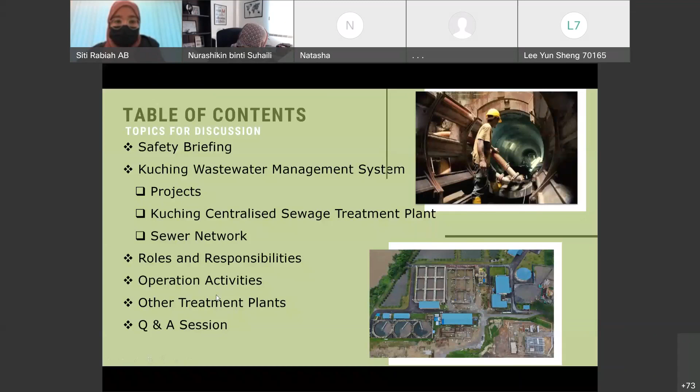Our treatment plant is considered a restricted area where only authorized people are allowed to go in. We are a non-smoking zone plant. All personnel and visitors have to wear proper shoes in the treatment plant. We practice a buddy system because we are dealing with deep tanks and deep shafts. We will not allow our officers or personnel to walk on their own, so just in case an incident or accident happens, they will have at least one witness or buddy to get help. Of course, visitors are not allowed to touch any machinery, process equipment, panel boards, or chemicals.

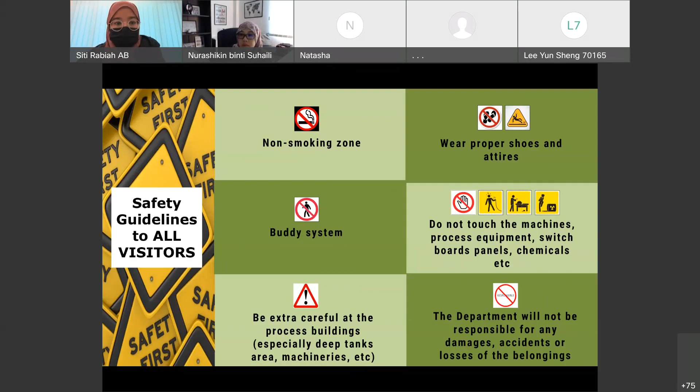So we proceed. May I know if any of the students are confused with the terminology of sewer, sewage, and sewerage? Can any of you volunteer?

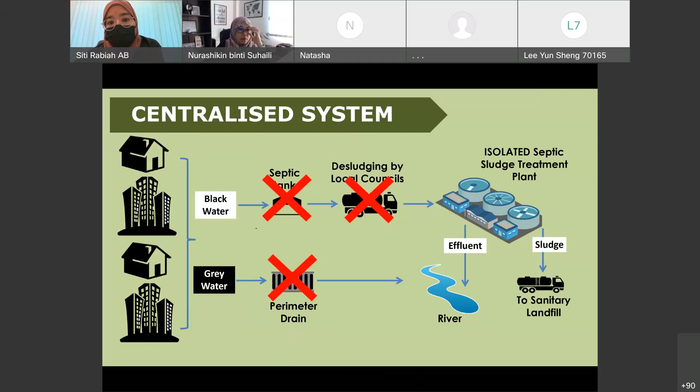It went viral a few years ago that in Japan they can rear fish in the perimeter drain, but unfortunately it can't be done here so far, not until everyone changes their attitude or connects to the centralized system. Okay, so what we do, we construct the sewer pipe from the houses.

We retrofit the piping at these houses, and we connect it through a true gravity flow sewer network, and it goes into the centralized sewage treatment plant. So you can see we no longer need the desludging work. So maintenance-wise, it saves quite a lot.

And also we save some space, because you can see what we have encountered before, especially rumah-rumah lama in Jalan Green or Rubber Road or old housing in the city center. Most of these people are now in their 70s or 80s. So when we visit the house, apparently they have extended the house, because last time the septic tank protruded above the ground, unlike now the septic tank is underground. In the old housing system, the septic tank protruded above the ground.

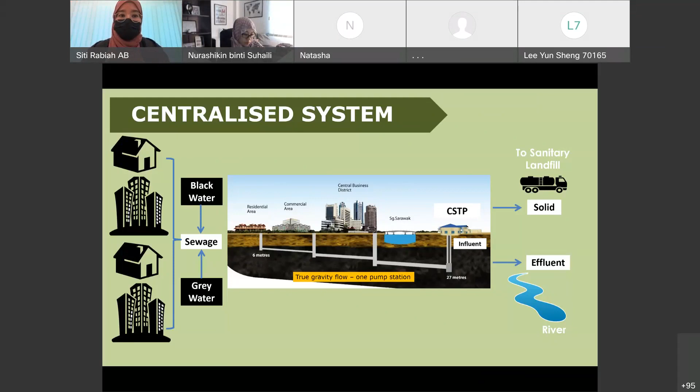Okay, so among the benefits of the centralized system, of course it reduces the amount of untreated waste, and it removes odor from the open drains, because there is no more discharge into the perimeter drain. So there's no smell, you know, Sarawakians call it bau juruk.

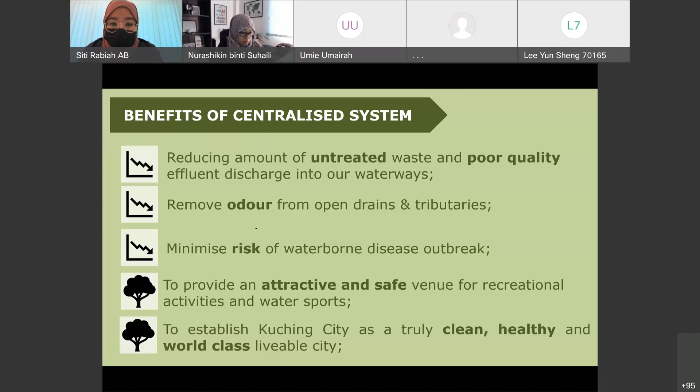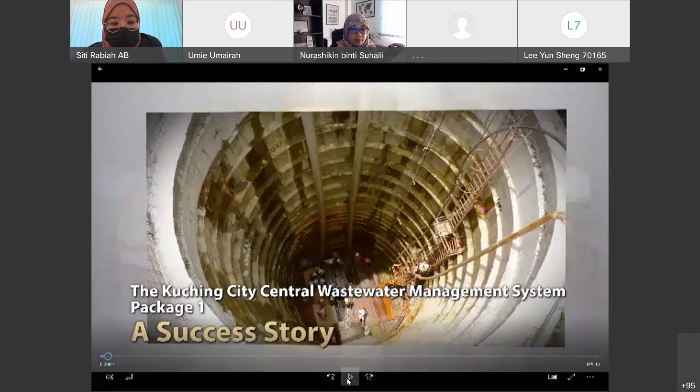So Kuching Wastewater Management System, I have a video here, but I'm not sure. I'll just share it, sekejap. Boleh tanggalkan video tu? Yes, we can view. Ada dengar bunyi kah? Bunyi tak ada.

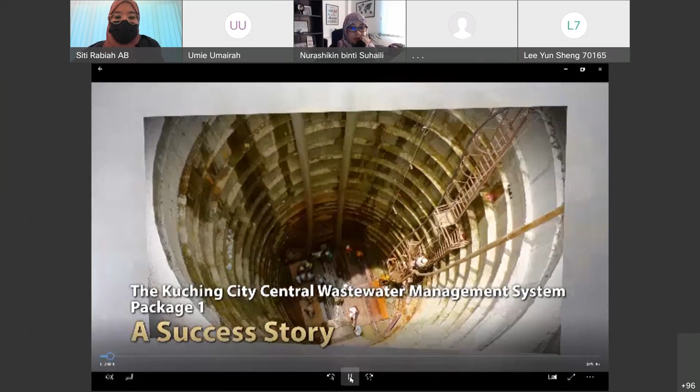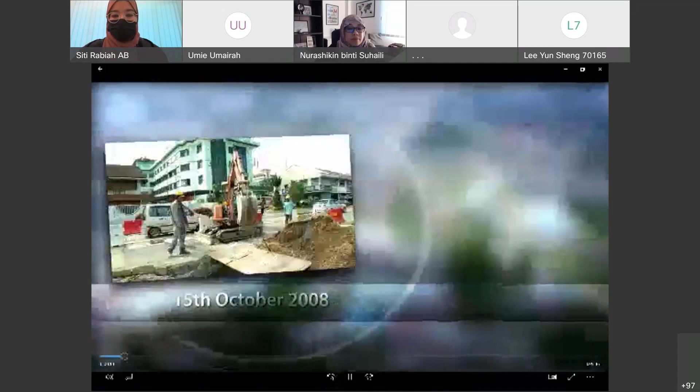Kuching City Central Wastewater Management System, Package 1, was implemented on 15th October 2008. This unique project, requiring a high level of expertise, was undertaken by turnkey contractor Kumpulan Nishimatsu Hock Seng Lee, or K&H Consortium.

Ada dengarnya bunyi juga kah? Yes, we can hear. So I'll just play this video for maybe 4 minutes, and then we go back to the presentation, okay?

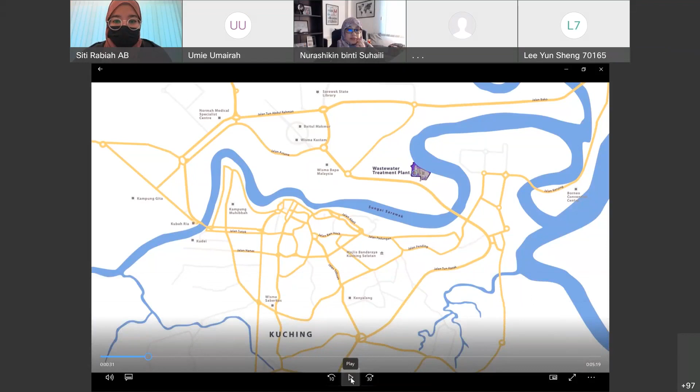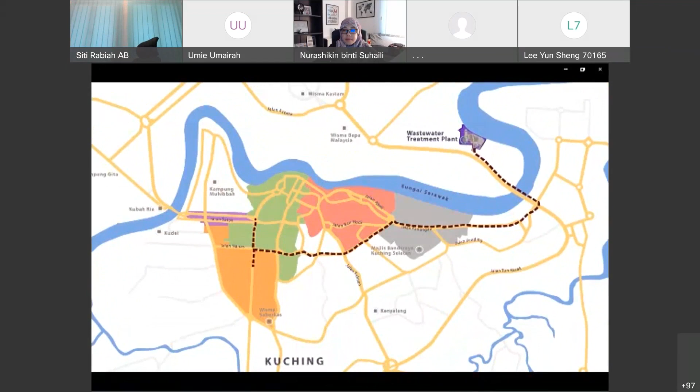The project involved the laying of an underground sewage pipeline system, encompassing 5 areas located mainly within Kuching city south. It covers a total of 64 kilometers of sewer network using gravity flow, which channels wastewater to a wastewater treatment plant with a capacity of 100,000 population equivalent, or PE. In order to ensure the task was implemented on time and with only minimal disruption to the city, the consortium adopted the state-of-the-art trenchless tunneling method, following in-depth studies on the successful completion of similar projects overseas.

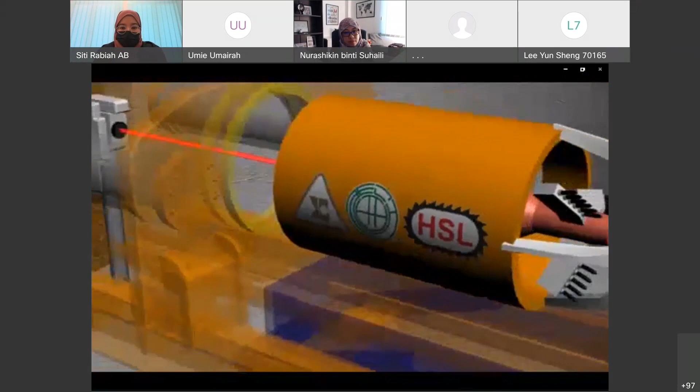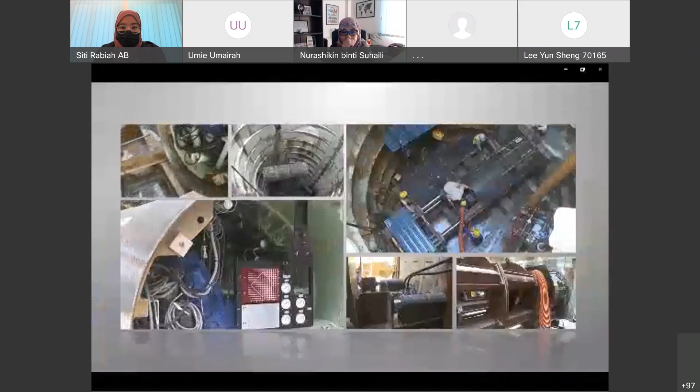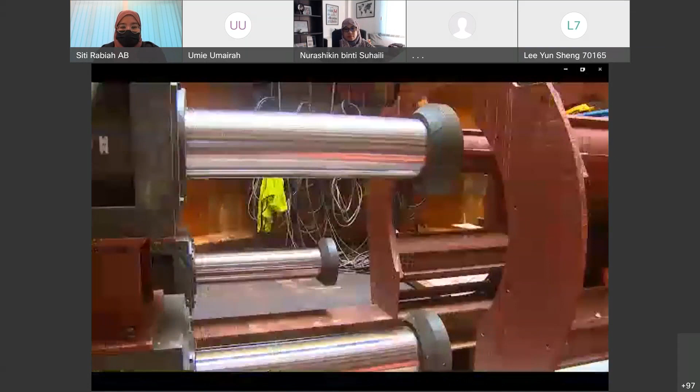With this proven method, the consortium procured by far the largest fleet of tunnel boring machines in Southeast Asia to deliver the job and to fulfill the government's stringent standards. This brought in an unprecedented scale of technology transfer, involving more than 18 million ringgit worth of machinery and technology, acquired from Germany, Japan, Taiwan, and Singapore.

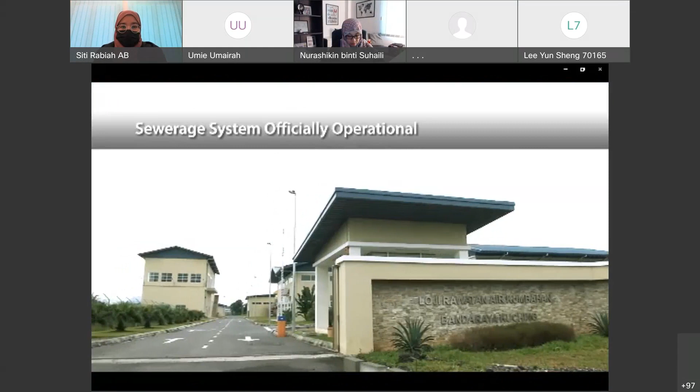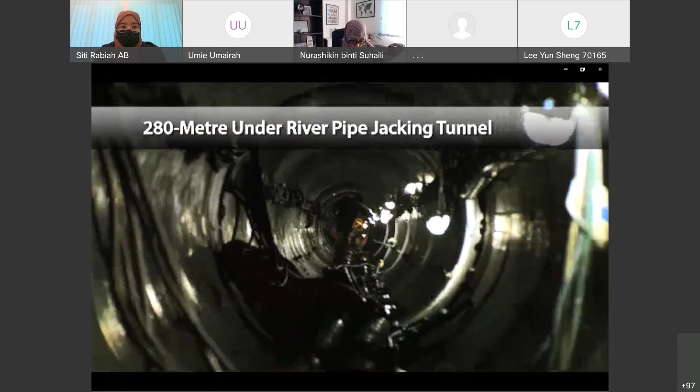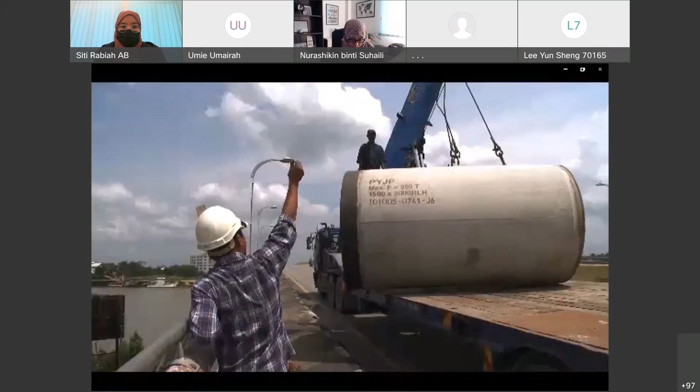The wastewater treatment plant was handed over in January 2012, while the main sewer line was completed in April 2013. The sewerage system was officially operational in July 2013. The project achieved many milestones, including a 280-meter under-river pipe jacking tunnel, the longest in Borneo, the deepest inlet pumping station in Malaysia, at 27 meters deep, and an impressive 2.5 million man-hours of construction work without any lost time injury. Combining the technical expertise and resources of the K&H Consortium, this first ever centralized sewerage system in East Malaysia was completed on schedule and within budget.

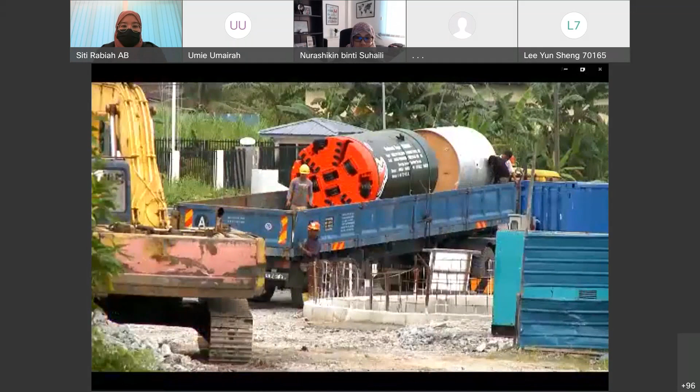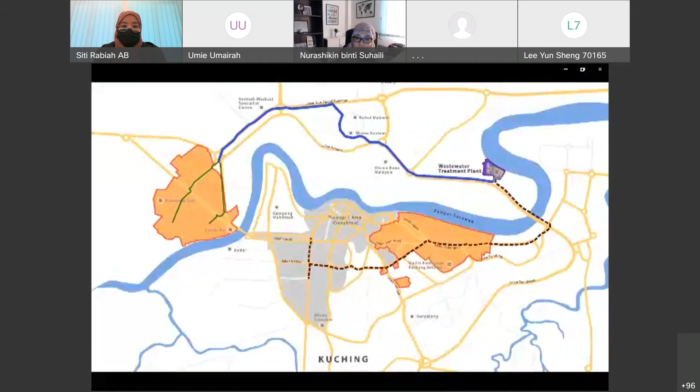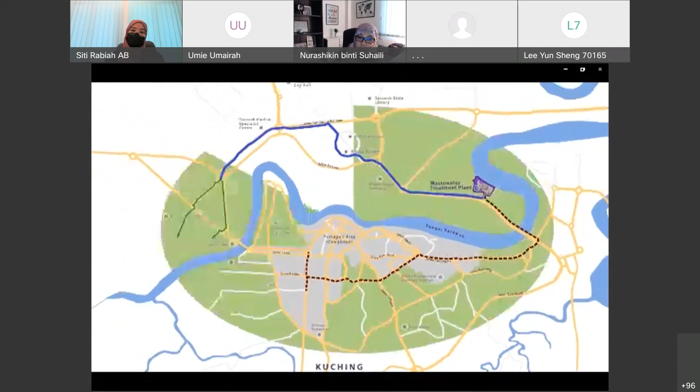With the successful completion of Package 1, covering mainly Kuching City South, the many benefits of this modern sewerage system should be extended to residents of Kuching City North. As part of the Kuching Wastewater Management Master Plan, the proposed Package 2 Zone 1 will include, firstly, the construction of a northern main trunk sewer spine totaling 7 kilometers across the Petra Jaya area, running parallel to the currently completed main trunk sewer line located to the south of the river. This will form a complete ring for the sewer network.

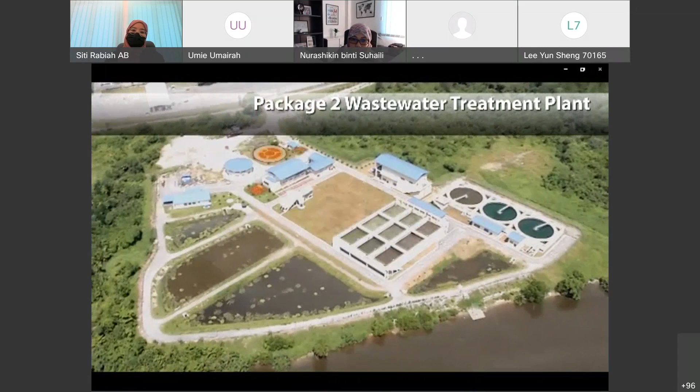Secondly, Package 2 will include the expansion of the existing wastewater treatment plant by an additional 100,000 PE. The new sewer line will be connected to a new inlet pumping station located at the existing treatment plant, thus expanding the sewer network to include both the city north and south.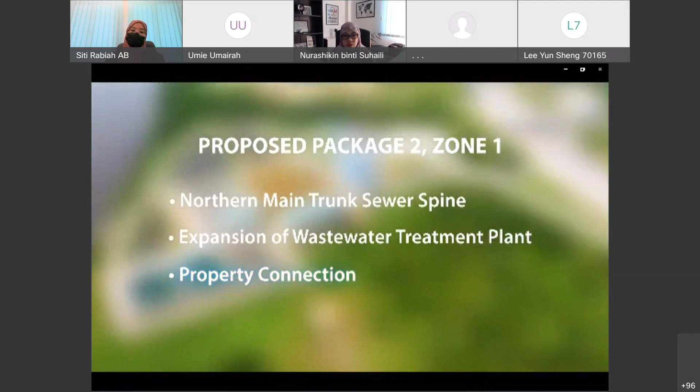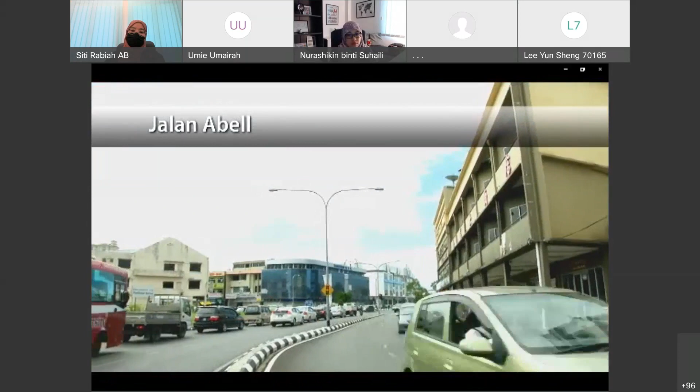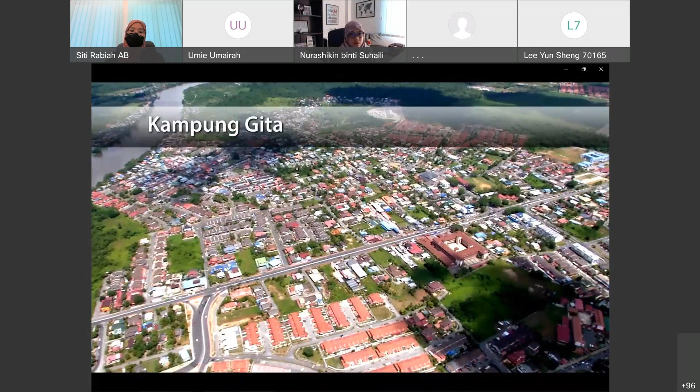Thirdly, this package includes property connection of additional 42,000 PE, consisting of 18,500 PE at Kuching South, covering mainly commercial shophouses in the city center, along Jalan Abell, Jalan Ban Hock, Jalan Padungan, and Jalan Tabuan, while the remaining 23,500 PE at Kuching North, covering mainly residential areas at Kampung Gita and Kubah Ria, along the proposed northern trunk sewer. As these areas are located at the most upstream point, they will provide sufficient flushing volume to maintain flow along the trunk sewer. Along with the northern trunk sewer, large institutions such as Normah Medical Specialist Center, Wisma Custom, Baitul Makmur, and Wisma Bapa Malaysia will be connected.

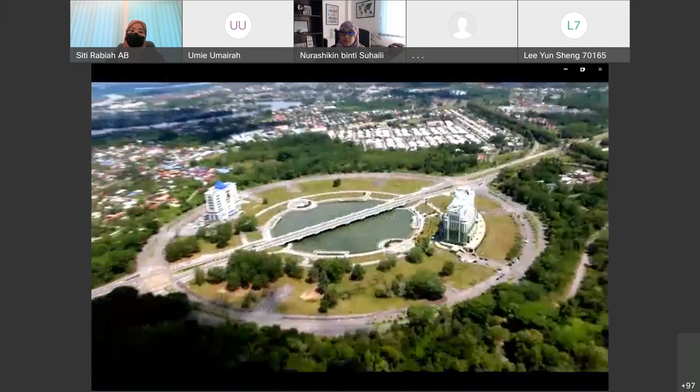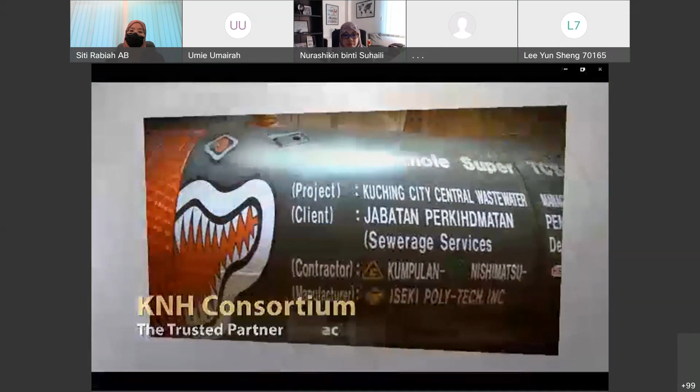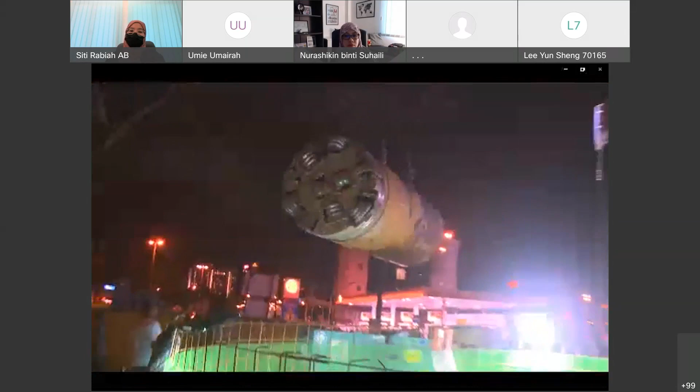Property connection work will be carried out progressively, beginning with higher density areas. Economically, the government enjoys long-term cost savings, as it can pass on all pipe connection costs to individual developers within the city area in the future. KNH Consortium's vast experience and technical expertise acquired from Package 1 makes it the most suitable candidate for the implementation of the proposed Package 2. The consortium's massive investment in specialized machinery for tunneling work means it can mobilize immediately, thus ensuring timely delivery of the project while adhering to the standard and budget stipulated by the government. With the implementation of Package 2, Kuching City will be one step closer towards realizing the vision of a clean and healthy waterway for the enjoyment of its residents in the near future.

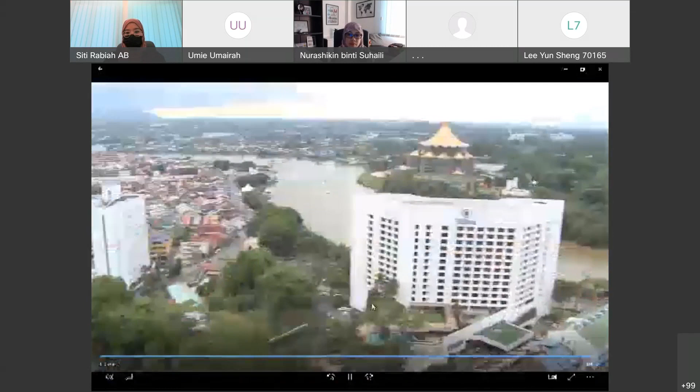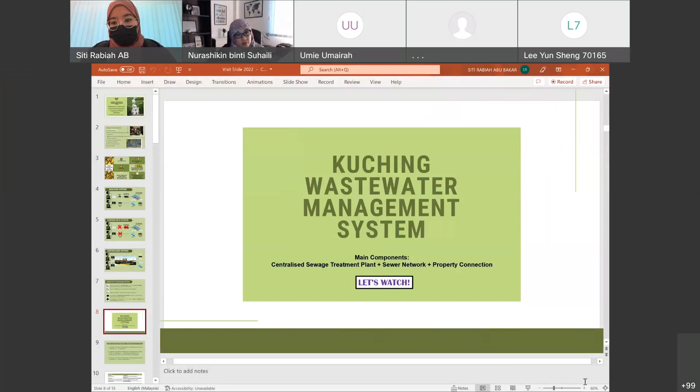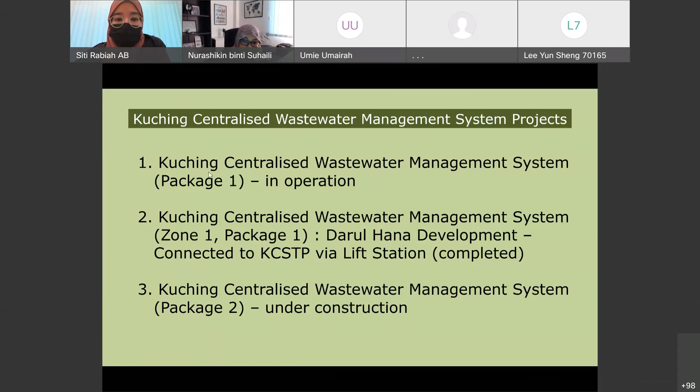Okay. So you've seen the video just now. It's basically what we actually do in the department and the plant operation lah. So we go back to our Kuching Centralized Wastewater Project. As you've seen just now in the video, it covered the Kuching Centralized Wastewater Management Package 1 and Package 2, which is still under construction. Apart from that, we have also completed the connection of Darul Hana development into our KCSTP as well. Darul Hana development is a state government project for resettlement of the kampung people along the Sarawak river, but they have yet to move in lah. So this is a little bit of background of the project.

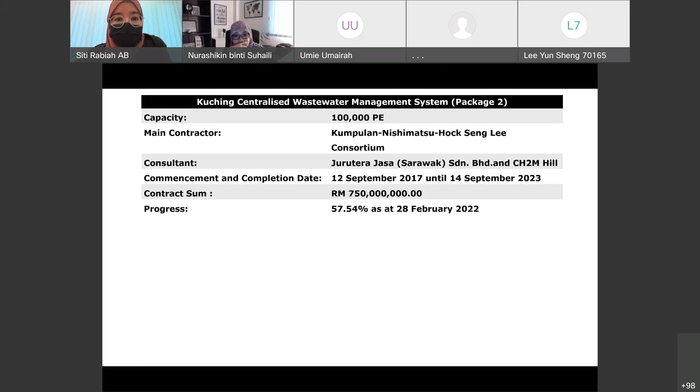So for Package 1, we have the main contractor K&H, Kumpulan Nishimatsu Hock Seng Lee, and the consultant is Jurutera Jasa Sdn Bhd, with a cost of 530 million. We have another smaller one, Darul Hana development, costing about 17 million. The works were carried out by Maximus Holdings Sdn Bhd, and the consultant is Consortium Malaysia, completed in 2019. Then we have the Package 2 project, costing about 750 million. As of February, the progress is about 58%. Roughly until 31st December 2021, we have about 99,000 PE connected into our Package 1 existing treatment plant lah.

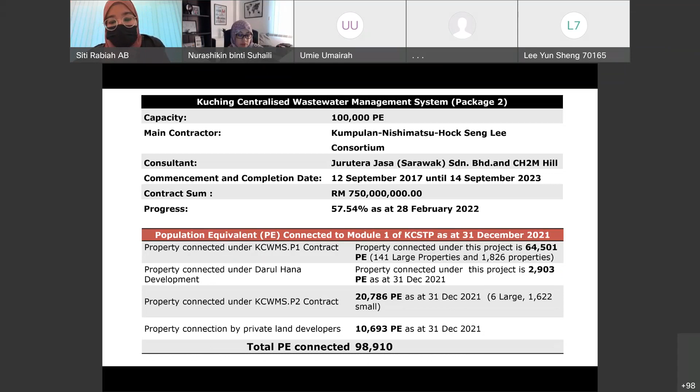So going back to the centralized CSTP, the wastewater treatment plant itself, usually if you visit our treatment plant, you will stay at this visitor center, number 8. So we have this inlet pumping station. Then we have this headworks. We have this ASR, activated sludge reactor. We have this secondary clarifier. This is the wetland, 4 ponds. We have the dewatering building where we produce the sludge cake. The operation building is where the administration and the operation monitor the process.

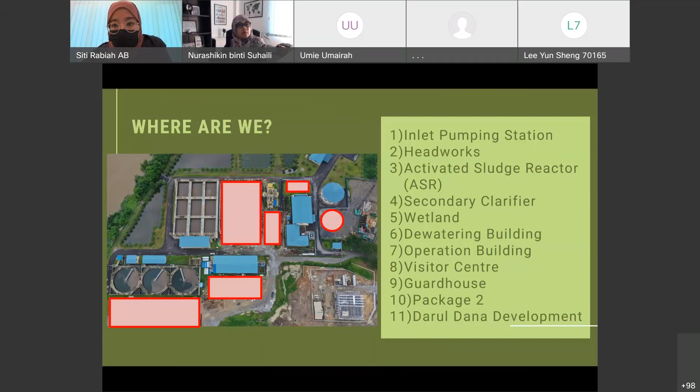The visitor center was the site office initially during the construction, but during the handover, the site office still looked good. Then we took over from the contractor and converted it into our visitor center lah. So this is the guard house, the entrance. These are the package 2 duplicate buildings, among the scope of work in package 2 lah, the extension of another 100,000 PE. Then this is the Darul Hana development, part of the Darul Hana development.

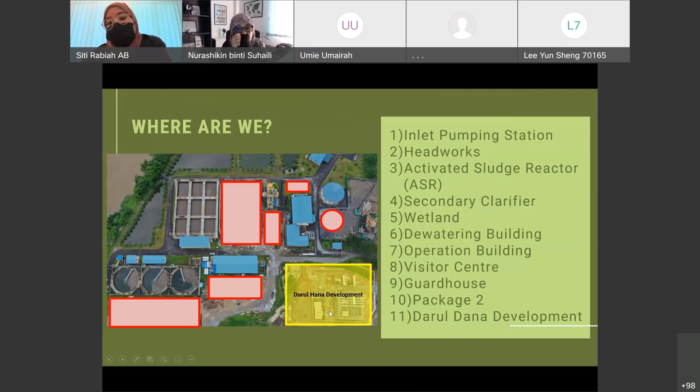For the treatment process, the influent comes into our IPS, inlet pumping station. This inlet pumping station is about 27 meters deep, so roughly a 10-story building underground. Okay. So we have the IPS, and then it flows into the fine screen to screen all the smaller bits of debris that escaped the coarse screen, and it will also screen grit, sand, small stones, hairs, and also oil and grease.

Then moving forward to the ASR, this is where the biological treatment starts to kick in, where we give aeration, and in some of the tanks we just switch off the aeration so that it can do nitrification and denitrification processes. Then it flows into the secondary clarifier, where we separate the top clear water as effluent and discharge it to the wetland.

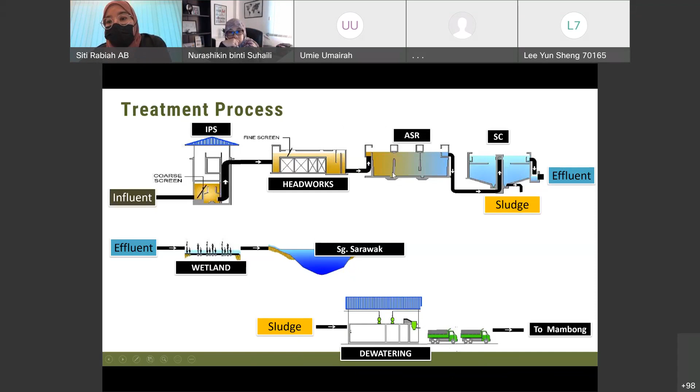But the bottom one, when the sludge settles at the bottom, we pump this sludge into the dewatering building. We add in some polymer to do the mixing, to do the dewatering. Then the cake will be sent to Mambong Sanitary Landfill. As for the excess water from the dewatering building, we channel it back to the ASR to be reused lah, recycled. So this is how it looks like.

Influent pumping station. The diameter is about 20 meters, but 27 meters deep. So this is where the collection of sewage is carried out lah. The coarse bar screen or trash rack traps the large debris at the inlet screen. Headworks, like I mentioned just now, removes the floatables, grit and suspended solids that can be filtered lah. Whatever cannot be filtered will flow into the ASR.

ASR is where the biological treatment happens. We provide DO so that the microorganisms have oxygen to multiply and eat more organic matter. Then it will remove organic solids, BOD, and nitrogen. Okay, and also with healthy microorganisms, it can also improve the sludge settleability.

Here, the secondary clarifier has a very slow wing arm that scrapes off all the floatable scum and channels it into the scum box to be processed. But there is also a weir at the tank to release the clearer water lah. With the weir, it will hold back the larger floating scum. Then we have to manually remove it from the tank.

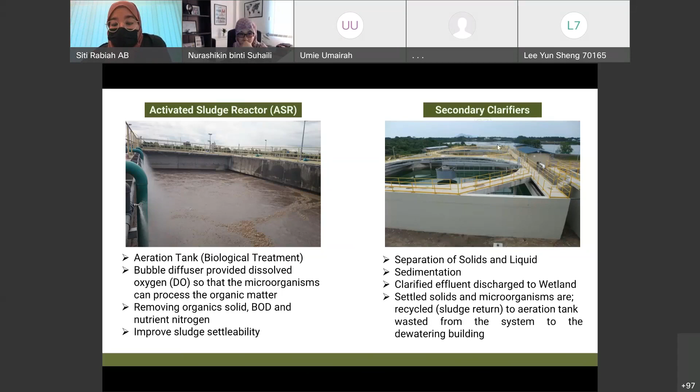Dewatering building: for our process, we reduce the water content in the sludge for production of dry sludge at a minimum of 20% dry solids. This is based on the MSIG lah. It's also a requirement by the Department of Environment. We do sludge thickening, we add in polymer to ease the dewatering process. And the sludge cake will be sent to Mambong Sanitary Landfill.

For the wetland, this is actually what we consider a tertiary treatment. If you visit some of the treatment plants, some just discharge directly from the effluent discharge point to a nearby river or drain. Or like in Semenanjung, there are plants that install UV just in case there's an outbreak, then they can switch on this UV to at least improve the effluent discharge lah.

But here in KCSTP, we adopt the wetland to be our tertiary treatment just in case of emergency, of course, because we have bigger land. But if the land is very limited, then you can have other options for the tertiary treatment lah. This wetland also gives us an indicator of whether our effluent quality is good, getting worse, or getting better.

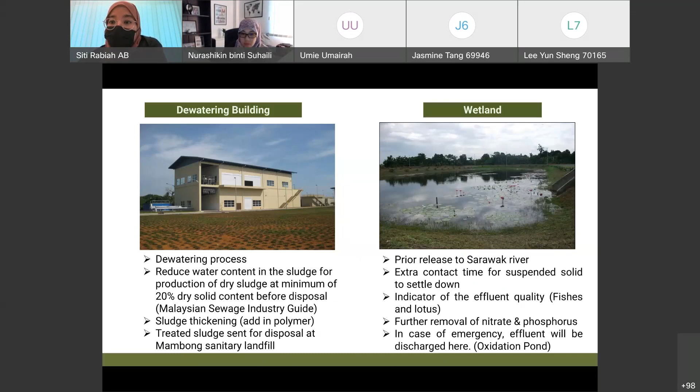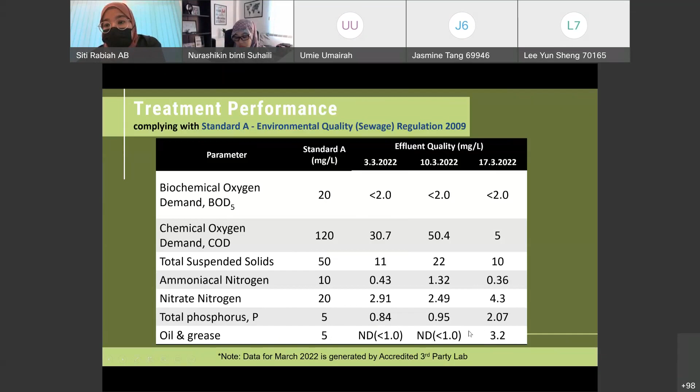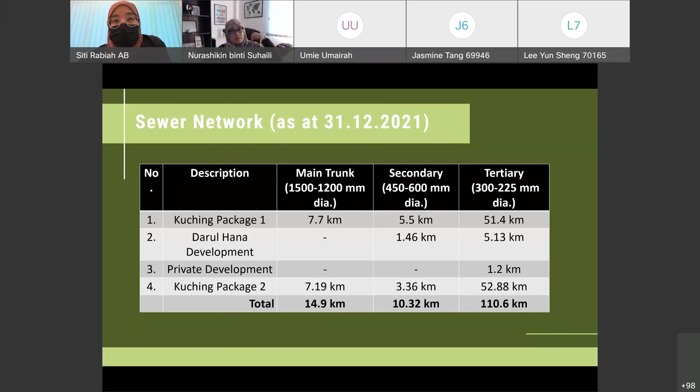These are the number of blockages that we have received since we took over the treatment plant, the operation and maintenance of the centralized system. If you can see here, in 2017 there were a lot of public complaints because they are not used to the system. Like, last time when you flush, you only flush and never bother where it goes. Sometimes they just flush whatever. Some even flush

chemicals, oil, everything into the toilet bowl. Then it will affect the efficiency of your septic tank. But if you flush it into the centralized system, it will not affect your own septic system because you are connected to the centralized system, so it will affect the whole sewer system instead. So if your neighbor, say your neighbor downstream, didn't maintain or abuse the centralized system, throwing things that shouldn't be thrown, as we have encountered before,

I think hair is normal, but hair is one of the major causes of sewer blockage. If you shower, especially ladies, your hair, you can see a lot of it at the floor trap. In certain houses, because the floor trap prevents hair from going in, it gets stuck at the floor trap, and they even took the trap off. So this hair eventually goes into our sewer system, which is not good for our operation and maintenance. Also, condoms are very normal, especially likely from the hotels.

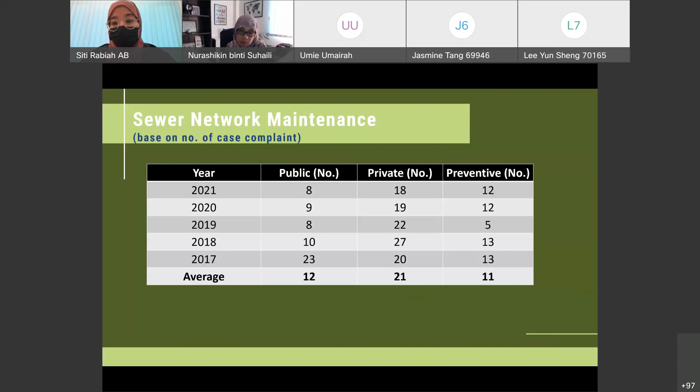Waste oil from the eateries is the major one, because when oil mixes with feces, and food waste like rice or chicken fat, vegetables, it hardens. Because the centralized system doesn't flush 24 hours, it depends on how many people use it. But at night maybe everyone is sleeping, so there's less water flow, so it may get stuck at some points of the sewer network. Until tomorrow morning, when everyone showers and goes to work, there's the flushing effect again, which moves all this fat, oil and grease slowly into the sewer system and eventually into the wastewater treatment plant.

We have received a lot of complaints from house owners up to the minister level. Everyone complains because they thought it is an abandoned project since no one works there. The shafts are here and there, so it disrupts the road, turning here and there. But actually, we are digging the shafts to stand by for the jacking of pipes.

So we cannot buat shaft bila kita mau jack saja. It will slow down because actually what consumes the most time in construction of this sewer network is the construction of the shaft itself.

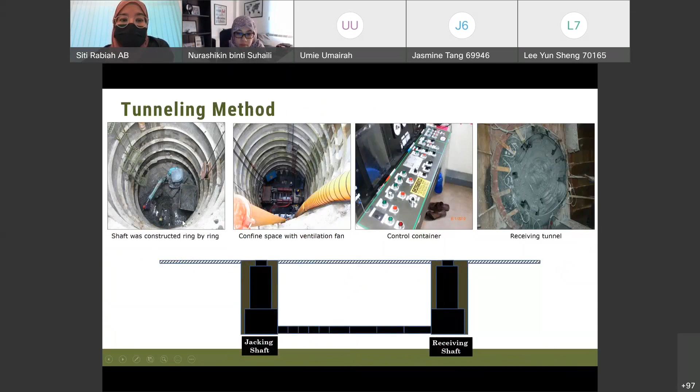So this is a trenchless construction method. Initially, this one you can see they use the method of concrete ring, cast layer by layer, but here you can see the materials is different. It uses steel casing.

Ada juga we lay the sewer network using open cut. For depth less than 2 meter, we use open cut.

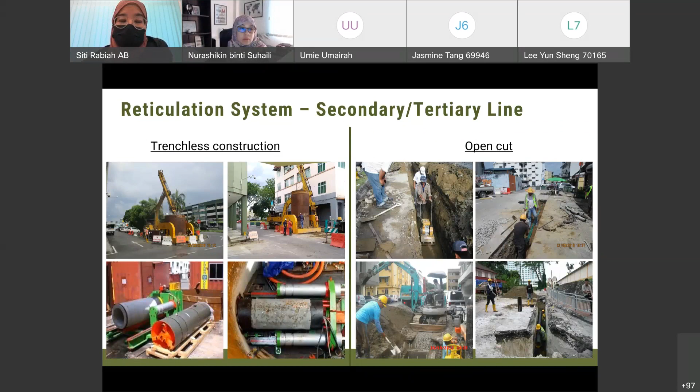So roles and responsibility of our unit, operation and maintenance unit, we have the same section for every unit. Ada setiap unit, Kuching, Miri and Bintulu, ada operation and maintenance section.

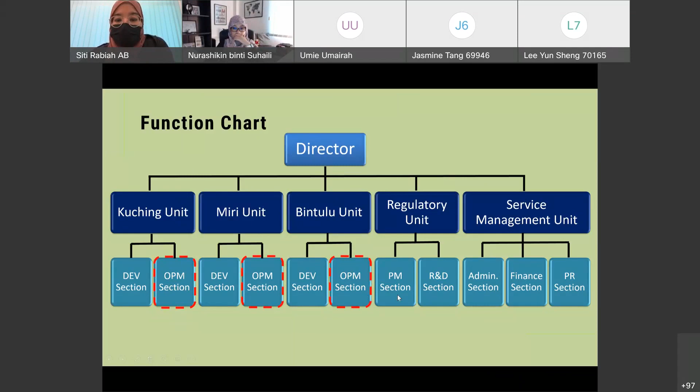So what we do, untuk treatment plant operation, of course we process the monitoring and daily operation in terms of performance of the plant, whether the parameters are at the optimum level. And then we do also PPM, predictive and preventive maintenance, where we do the maintenance for M&E and I works. We do sewer network maintenance.

If ada blockage, then the public will call us and we will send our men to do the clearing. Routine maintenance work, the general one, clearing and cleaning works. We have compound maintenance work, grass cutting. And then we also have building maintenance work and wayleave application.

And we do administrative works like public relation, contohnya like this one. This is part of our PR works where we do educational talks, not even only to UNIMAS, we do even to other agencies yang interested to visit us. We also assist UNIMAS students doing PhD for their research.

These are the contoh-contoh kerja-kerja yang terlibat di dalam operation works. Of course, we have 3 shifts of 8 hours, so pagi, petang, and malam.

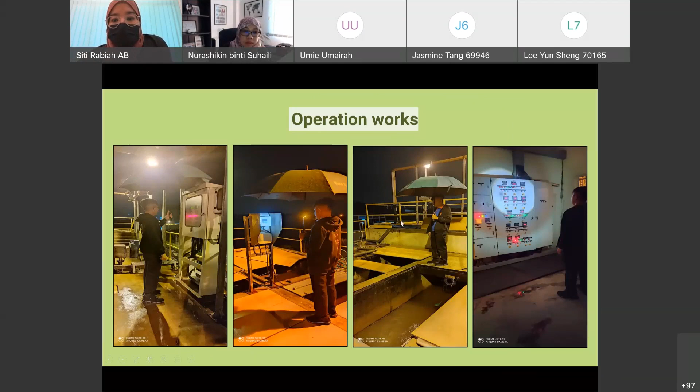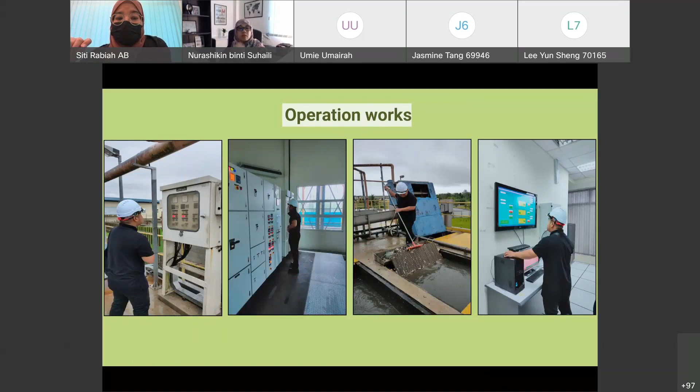So they monitor the reading, the panel. We are actually monitoring it using a SCADA system, where there's a software installed, where they can switch on and off the equipments or machineries just using the computer. But sometimes they also need to visit the panel or the equipments just to see whether, just in case, if it's not functioning well.

So in 2021, we have carried out 52 numbers of sampling. So none of it so far had non-compliance. Only for sludge dryness, we only carried out 51 numbers because there was 1 week of maintenance of the dewatering building, the maintenance of the hopper, so they cannot get any sample to be tested.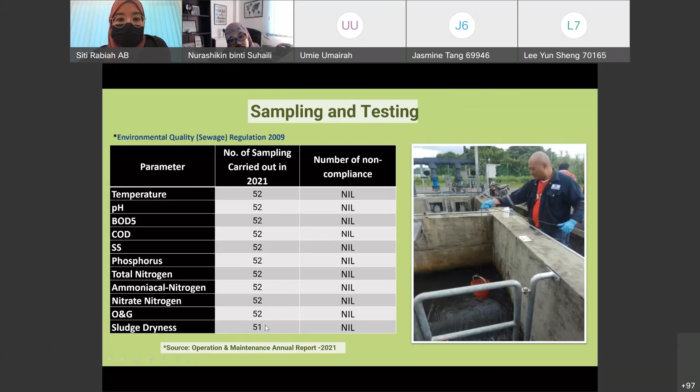Sewer network maintenance, we do periodic inspection, especially at the hotspot area. We also repair the major sewer. We do clearing blockages, we flush. Also manhole level adjustment, if any. And also manhole cover replacement, if ada yang hilang.

So these are contoh-contoh kerja-kerja yang dilakukan. These are considered as the 3D work: dirty, dangerous, and apa lagi satu? Difficult.

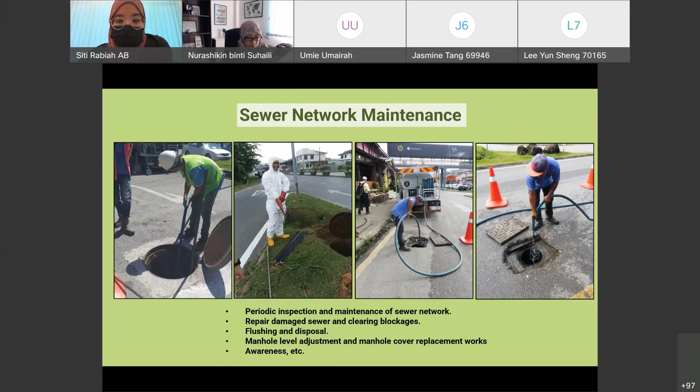For safety and security, we send our personnel to get the AESP certification before they get involved in sewer network or plant maintenance work, because manholes are considered a confined space. Also for our IPS, since you only have one exit, there has to be briefing or exposure to safety and health knowledge regarding confined space.

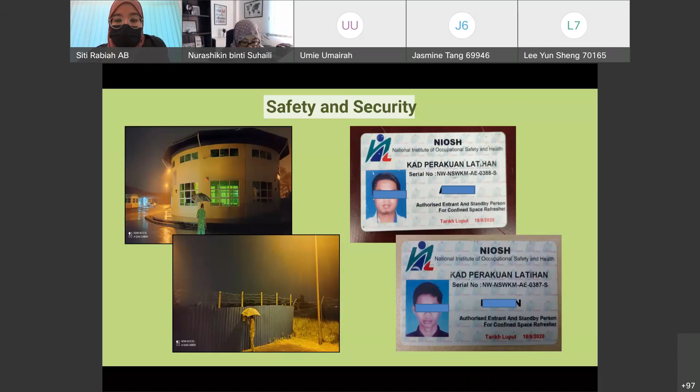These are the compound maintenance work, clearing works, public relations. If Nurashikin can see some of your students here, I believe, engineering course.

Other than this, we also have other treatment plants in Miri. This is a new one, recently completed last year. Despite the COVID situation, we managed to take over one of the plants. But if you see in Miri, the process is not quite the same - the secondary treatment uses extended aeration.

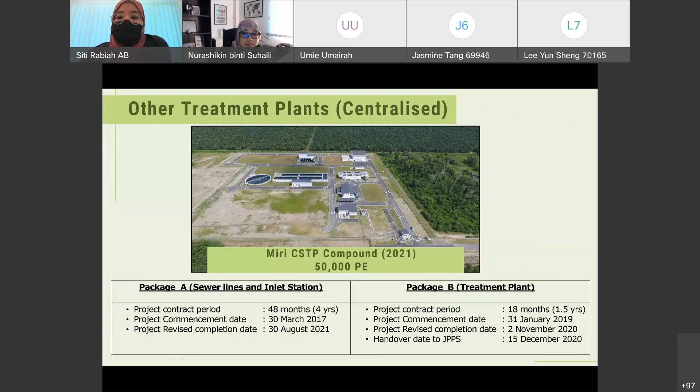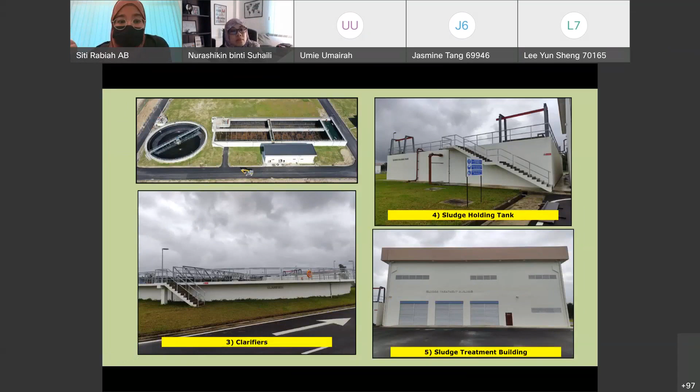This is the operation building. In Kuching, we have headworks, but in Miri, we have this aerated grit, grease, and secondary screening. In Kuching, we have ASR, in Miri we have aeration tank, sludge holding tank, clarifiers. In Kuching the tank is on the ground, but in Miri it's underground. In Kuching we have wetland, but in Miri we have effluent disinfection tank. We don't have wetland in Miri.

Why did the designers or consultant not propose a wetland in Miri? Because the river source for discharge is far, so they just discharge it to the perimeter outside earth drain. Then eventually this earth drain becomes the so-called tertiary treatment before it reaches the river.

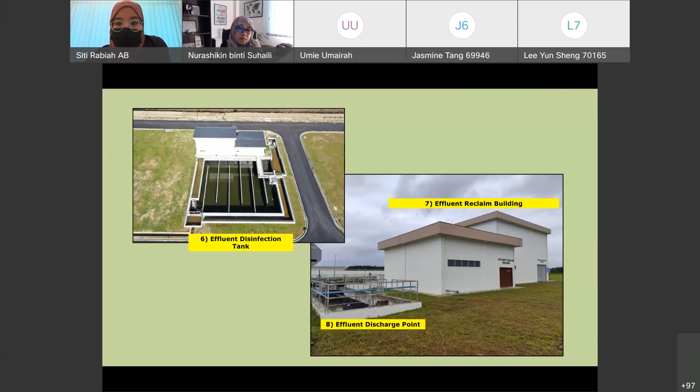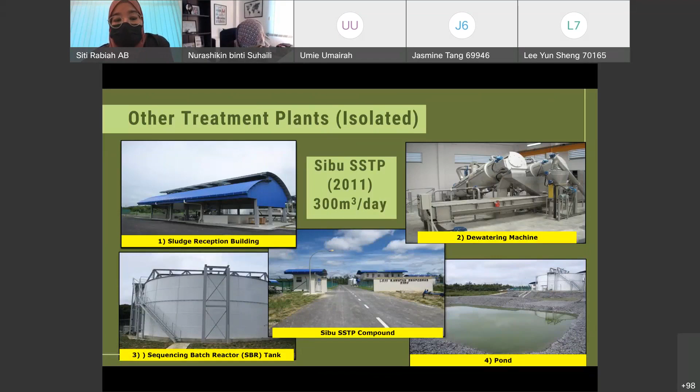Sibu is the same size, also applies the SBR process. Only in Miri, if you see, they use a rectangular tank, but in Sibu we use a circular tank.

We have also taken over Bintulu's sewerage assets as well, starting 1st of January 2021, we took over Bintulu from BDA. They have a lot of pumping stations and lift stations, 80 numbers. If you see in Kuching, we only have one, but in terms of maintenance, we only need to maintain one pumping station with a few pumps, rather than 80 pumping stations with more than 200 pumps that we need to maintain. It caused a lot of headache to BDA initially, but now that we've taken over, we're slowly planning how we want to get rid of these numbers of pumps.

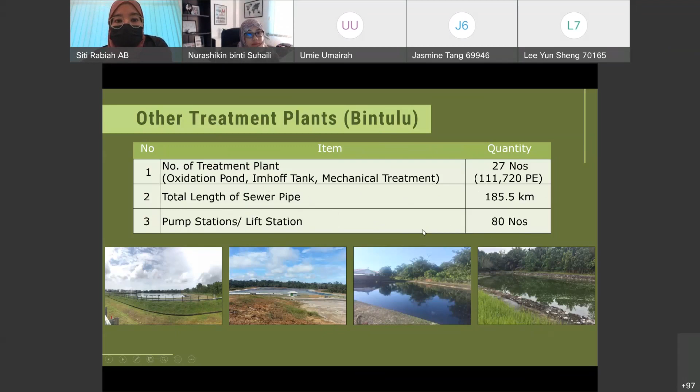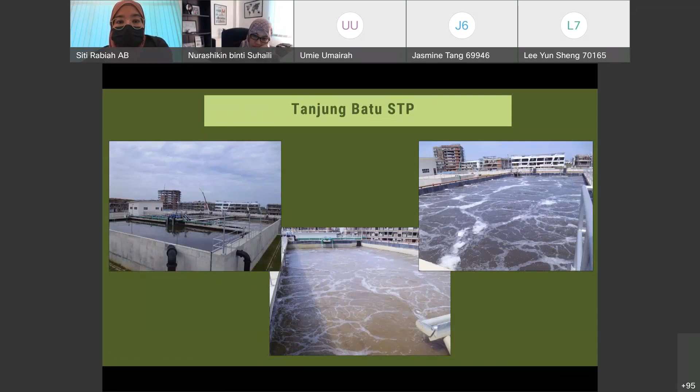We have an oxidation pond in Bintulu, and this Tanjung Batu STP, also a centralized system. But Bintulu's centralized system uses SBR.

Okay, so basically that's what I share with you, what we do in the operation and maintenance unit of Kuching section. So we maintain the Kuching centralized wastewater, Kuching centralized sewage treatment plant, and also the sewer network.

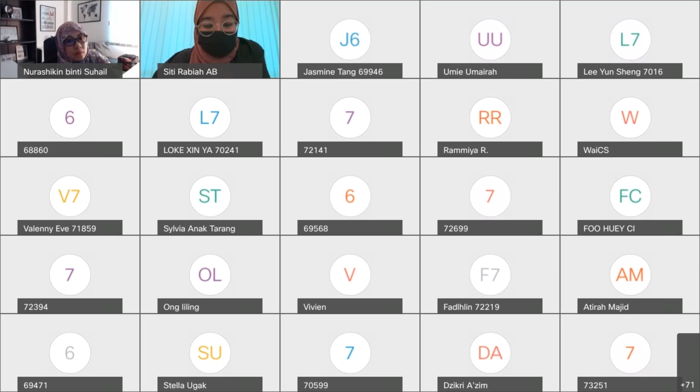So eventually we have plans for this plant to be very energy saving. It generates electricity in return, right? Yes. In Semenanjung, if you study the Pantai 2 treatment plant, it's an underground treatment plant that caters for 1 million PE in the Klang Valley. They use the sludge to produce methane. But our sludge is not enough to process. If we process it, the cost of the process is more than the methane produced itself. So we are not proceeding with that.

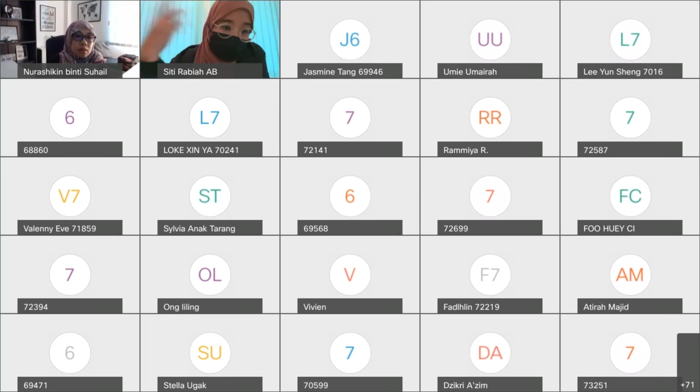Just wondering, how many plants in Malaysia generate methane? In Semenanjung there are many, because in KL the population is very condensed, very dense. So there's a lot of contribution. They also contribute to the country actually.

Now in Miri, we are planning to do research on how we can use this sludge as fertilizer for oil palm. So that we use all the things we throw away, not only waste materials, but also waste from the body. So recycle. But it needs research. If your students have interest to do research using our sludge, our wastewater, our effluent, we welcome them. Oh, yeah. That's a very interesting area to explore.

Yes, because in the future, until when do we keep dumping the sludge at the sanitary landfill until it becomes a hill, and then what's next? Yeah, correct. So that's the way forward actually. Many students, based on my interns, initially are not interested in wastewater. They think engineers just working at the plant have nothing much to show off. So usually they want to be a road engineer, or a structural engineer because structural seems very difficult.